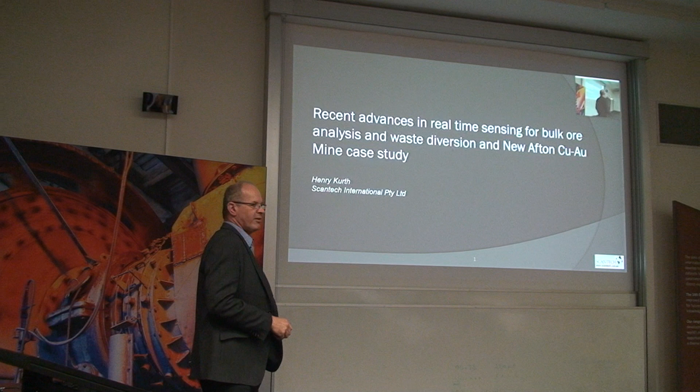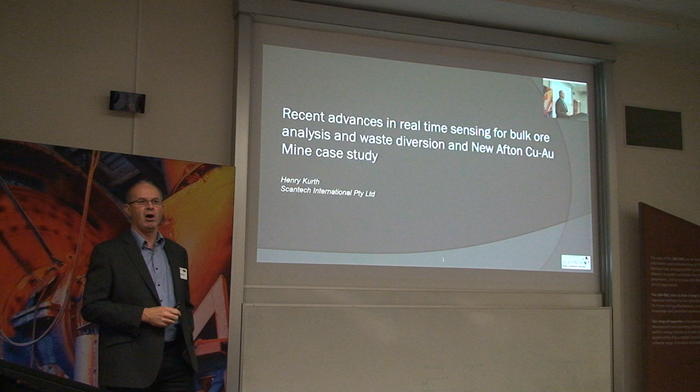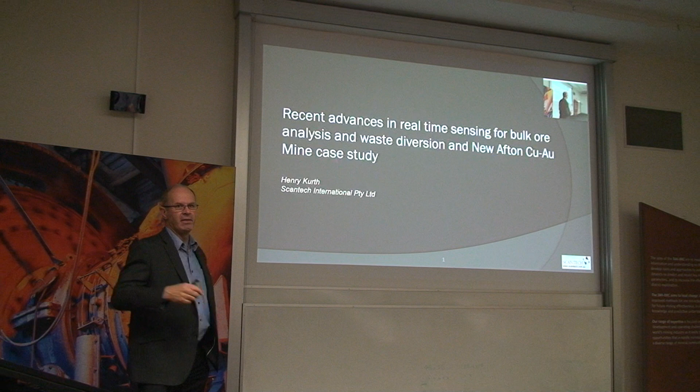So today's presentation - I guess there's a lot of interest now in the industry on trying to improve the efficiency of processing operations. There's large reductions in grade historically, so we're treating material that's much lower grade. What we're looking at are opportunities to use the latest technologies to improve the quality of material going to a process plant. One application is real-time sensing and then making decisions based on those sensing results. So this presentation focuses on the sensing technology, how it works, what it does, and then how it's being applied to various operations, particularly at New Afton copper gold operation. I'll talk a bit about the history of why they thought the sensing would work and some investigation work that they did, and then how it's been implemented and where they're at the moment.

Typically we find that we need to explain the technology in most audiences because they're not all aware of the technology's capabilities, so we typically do a bit of that. Then we talk about some of the other applications, of which this is just one of many, so we need people to be aware of that. We haven't designed this equipment for bulk sensing, for bulk diversion or bulk ore sorting - that is just one of the applications of this technology. And then we can talk a bit about New Afton and then just summarise.

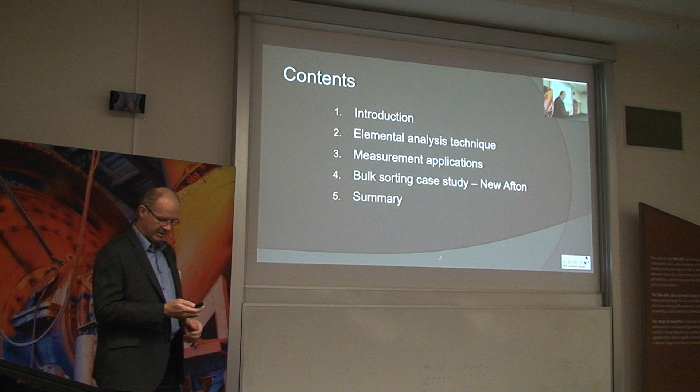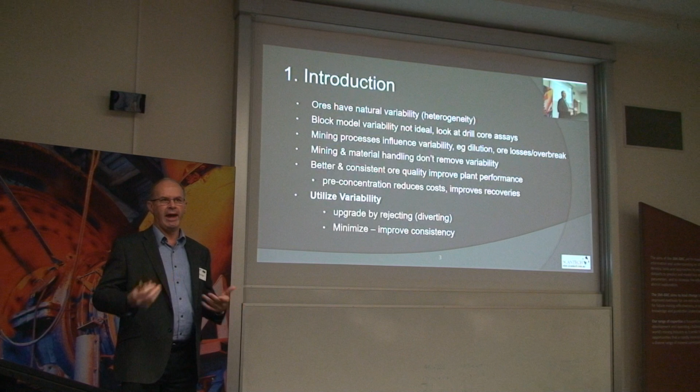So why do we need this technology, or why is it applicable? And the reason is because ore bodies have variability. If ore bodies were all homogeneous, we wouldn't need to worry about process engineers, we wouldn't need to worry about real-time control, feedback, reactions to changes - we would just have a nice manufacturing plant. And that is one of the main differences between manufacturing and the mining industry. Manufacturing deals with controlled inputs, the mining industry deals with a highly variable ore body. And it's not just variable in the way it's mined, but its quality, the flow rates to the mill. So there's a whole lot of parameters that vary, and what we're trying to do is just look at some of those parameters to try and measure them. For us, it's the composition.

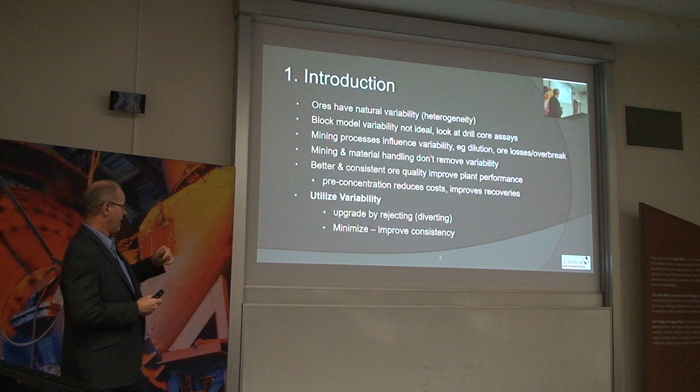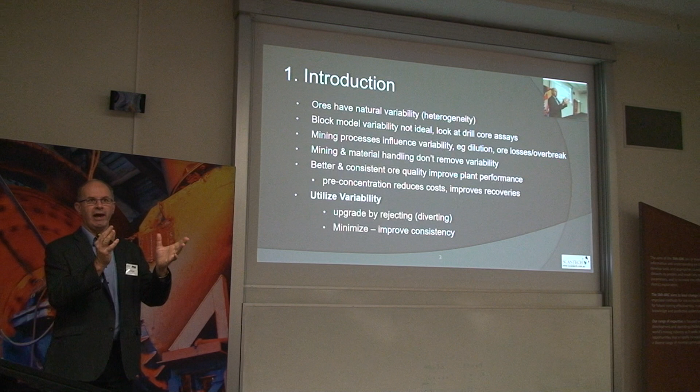So if it wasn't for the variability, we wouldn't need to develop these technologies. Having said that, there's very few measures of variability we can currently use that will help decide whether this technology will be useful, and that is one of the big problems. It's very easy to look at a block model and say, okay, we have a block with a certain grade or quality parameters, we have another block, but because it's an averaging process, you find there's not much variability between blocks, and these blocks could be thousands of tonnes or tens of thousands of tonnes. What we're measuring at is a much smaller scale. So we're saying, well, what's the variability every 10 tonnes? And the block model won't give you that. So you have to go back to drill hole assay data and say, what's the variability down a drill hole?

Because that is the level of detail we're seeing on a conveyor and measuring in real time. So that's sort of the context of why we need to do a bit more investigation to understand variability at an ore body scale. And it's not just the variability in the ground, it's what we do with that material. We mine it, we dilute it, we leave bits of ore behind, we stockpile it, pick it up and we process it, hoping that it's homogenised, which it never is.

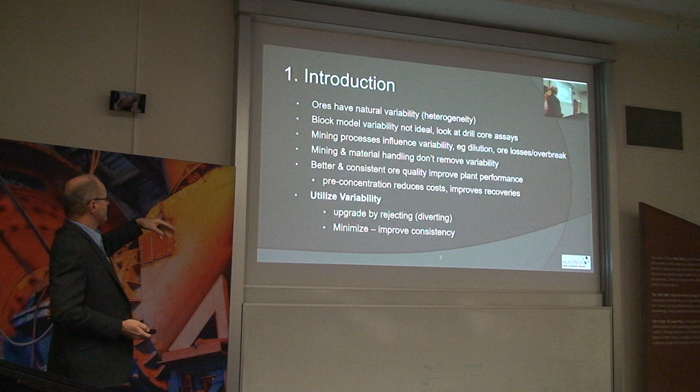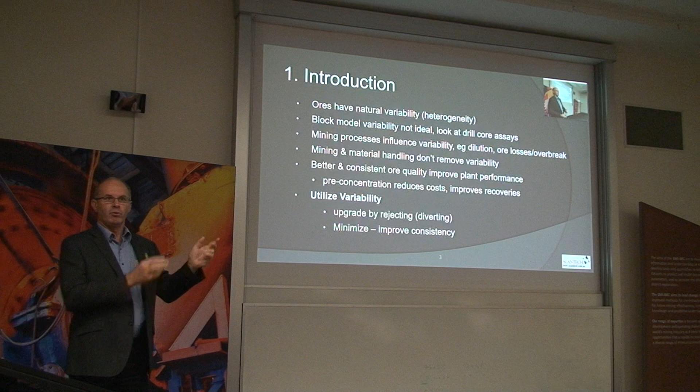So what we're looking at is some sort of a pre-concentration application here where we can remove undesirable components of the flow between the mine and the mill so that we don't have to treat those. And if we can remove waste to upgrade the material, produce the same or more concentrate from less tonnes of feed, that's a good thing.

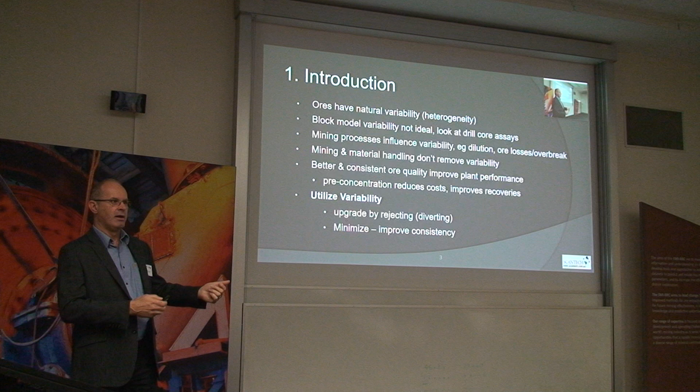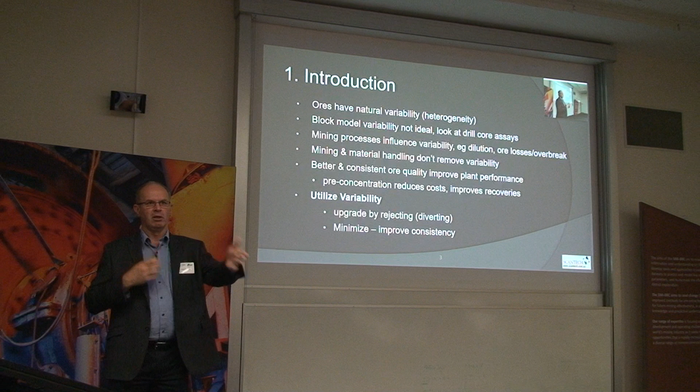The key thing with variability is we don't want to homogenise the flow. We want to retain the variability so that when we measure it, we can then respond to it and remove or make decisions based on those measurements of short increments of flow. So we can remove waste, we can remove deleterious material, we can stockpile low grade, high grade separately, and then we can control what we feed to the process plant. So the way we want to do this, ideally, is in real time. Now, part of the sensing technology also really requires that it's representative.

There's no point having a sensor that's giving you ballpark figures, not really in a meaningful, representative way that you can make confident decisions based on the data it's generating. So what we need is a method that's accurate, representative, reliable. We can have high confidence in the technology.

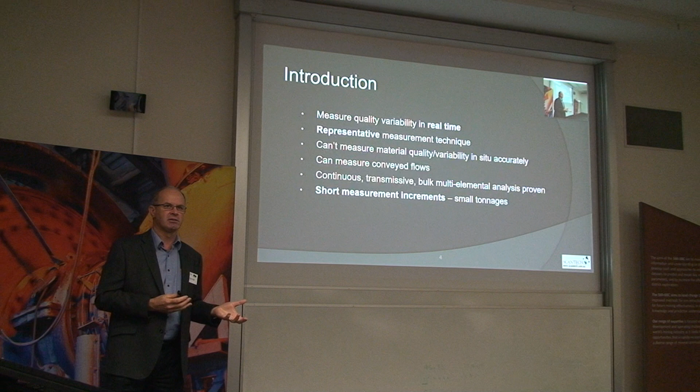The advantage of sensing technologies is they're very good at measuring conveyed flows because it's an ideal presentation to the technology. It's very hard to measure a haul truck because its configuration isn't ideal for most sensing technologies. It's okay if it's uranium grade - you can put a scintillometer there and detect the signal given off by the truck. That's great, but we can't do that for copper ore, lead zinc ore, or gold ore, so we have to come up with other ways of measuring that material.

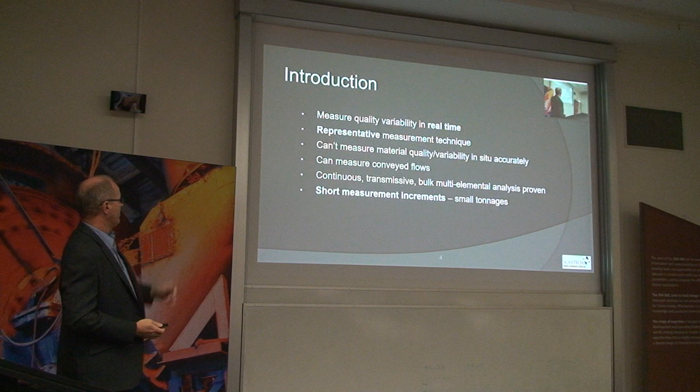The advantage on a conveyor is the continuous flow. We can measure using a technology that's transmissive, so it penetrates the full flow across the full cross-section of the belt as it's moving along. We're measuring continuously through the material, generating multi-elemental results as short as every 30 seconds.

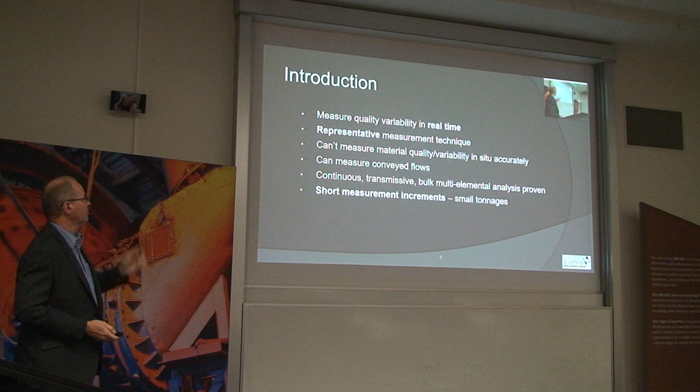The short measurement increments mean we can make decisions on small tonnages. This increases our selectivity in terms of bulk diversion or bulk sorting, which is what this presentation is about. When we talk about sorting, most people think particle by particle. What we're looking at here is basically increments of material - it's not really sorting, it's diversion of an increment, more like an automated grade control. The focus is on bulk measurement, decisions on bulk increments, not particle by particle.

Effectively what we're doing is trying to divide that flow into different components that we want to control. Some of that material could be better ore that we want to process earlier in the mining timeline. We might want to put poorer ore to a different process or stockpile to treat later. We might have sulphide and non-sulphide material that can go to flotation or leaching - different processes that apply.

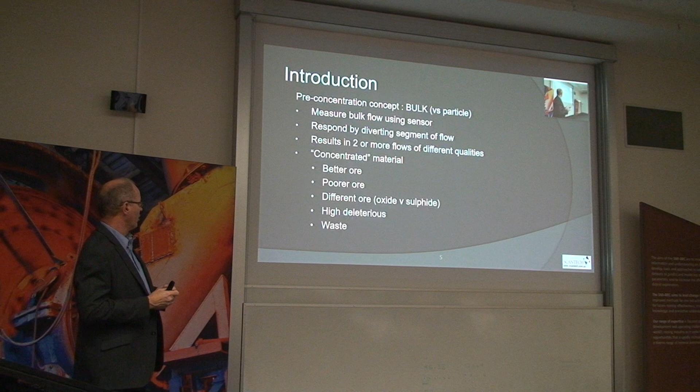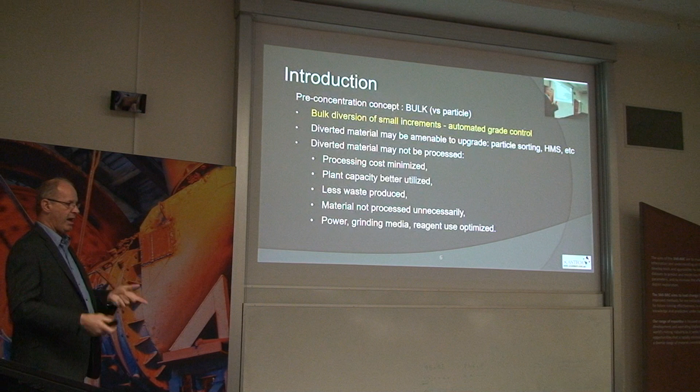There could be highly deleterious material we just don't want to process. Copper grade might be great, but talc content could be 20%, so we may not want to process that material. And obviously waste - if we can get rid of waste before we process it, fantastic. Less material going to tailings, less reagents spent, less power, less grinding media. Any waste we don't process has huge benefits to the operation.

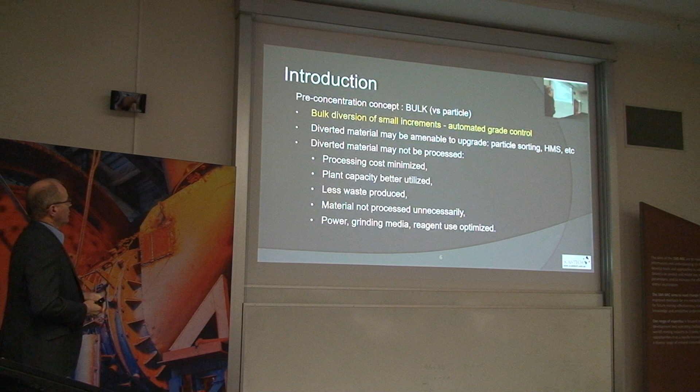So what we're effectively doing is automated grade control on a conveyed flow. Instead of a geologist looking at a haul truck and saying that truck loads ore or that truck loads waste, we don't necessarily need to do that anymore. We can put everything on a conveyor, measure it accurately, and make decisions on every maybe 10 tonnes - an objective way of measuring based on elemental content.

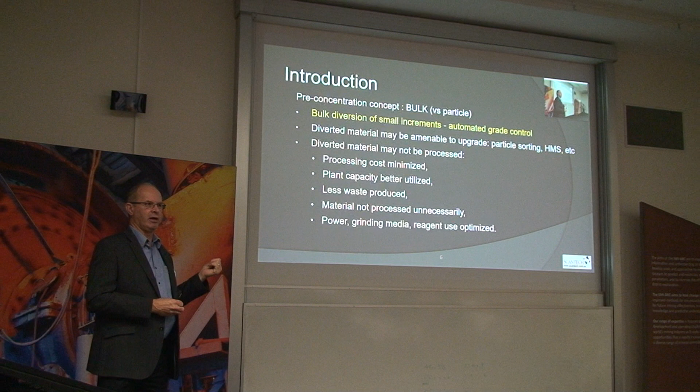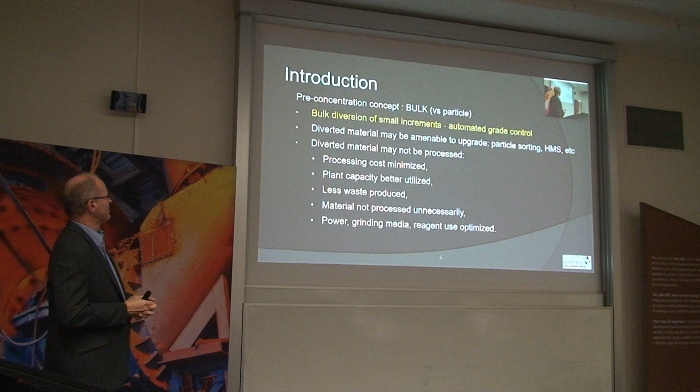I'm not saying - I'm a geologist, I don't want to make geologists redundant. I think there's still a lot of requirements for geologists, but in a grade control application like this, maybe there can be less geological input.

Some of the material might be suitable for upgrading via other processes. For example, if you have a high-grade ore that's diluted, it might be very amenable to particle sorting or dense medium separation, or some other method of upgrading that material and then putting it back into the plant so the waste component is thrown away.

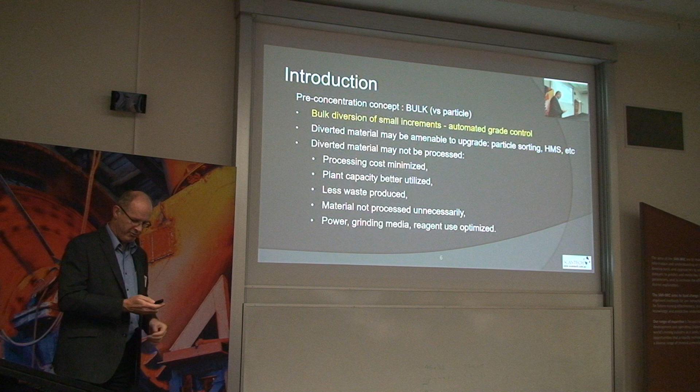There's a whole range of benefits, which you're all aware of, in not processing material unnecessarily, so I won't go through those. So let's talk about the technology.

The technology is not new - it's been around for 30 years on a conveyed application. It's been used in the coal and cement industries for over 25 years, and used for laboratory analysis back into the 60s, as far as we can find, probably earlier.

The key aspect of the technology was prompt gamma neutron activation analysis. Prompt gammas are what's produced from the neutron activation process, and we're analysing the spectral data from a series of detectors above the belt and from a source underneath the belt.

Now we use californium-252. It's the most prolific generator of neutrons available. It's currently the most expensive substance known to man, but don't let that bother you — we only need a small amount, so we use 50 micrograms to start with.

It has a short half-life of 2.65 years, so every 2.5 years we add another 25 micrograms to the unit to get the activity level back up, and then it decays over 2.5 years, you top it up, etc. So the level never goes below 25 micrograms, which is the basis for our performance estimates for each element in terms of measurement accuracy. We get better than that most of the time, but that's the minimum, the worst accuracy we go down to.

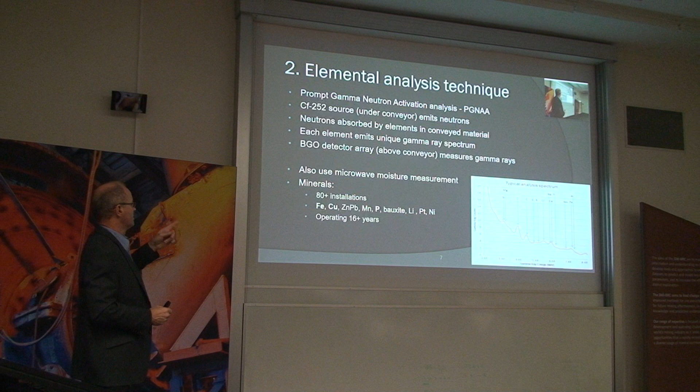In minerals now, we have had installations since 2002 in the iron ore industry, so we have close to 85 installations now in about 10 different commodities. I haven't included the coal and cement sector in those, because this configuration is a much higher specification than the one we use in coal and cement.

And that's part of the problem if you're looking for a unit these days — there's a lot of vendors. Each vendor will say, well, we use PGNAA, and by definition, because there are 80 successful installations, it will work in your mine. The problem is, different configurations will not work. So it has to be configured appropriately to the mineral sector, and it has to be custom calibrated to each application. You can't use an off-the-shelf calibration and achieve the sort of performances I'm going to be talking about.

So the elemental system is usually mounted on a conveyor with a walkway — you can stand next to that unit. The level of radiation on the outside of those tunnel shields is the same as 10 bananas. However, in Queensland, we've got to put a fence around it and use a smaller source. But you can walk into any supermarket and there's no warning signs around the banana display. It just shows that regulation in the mining industry is out of control.

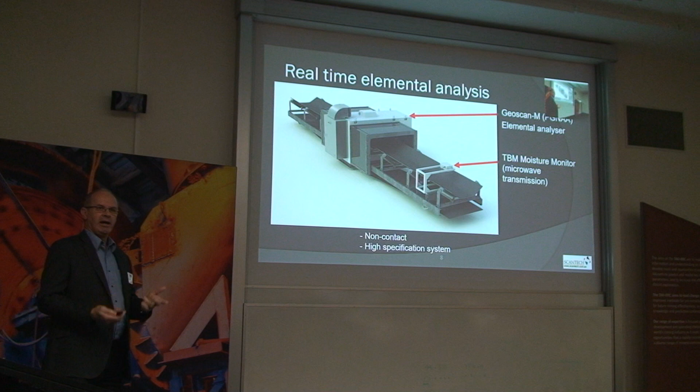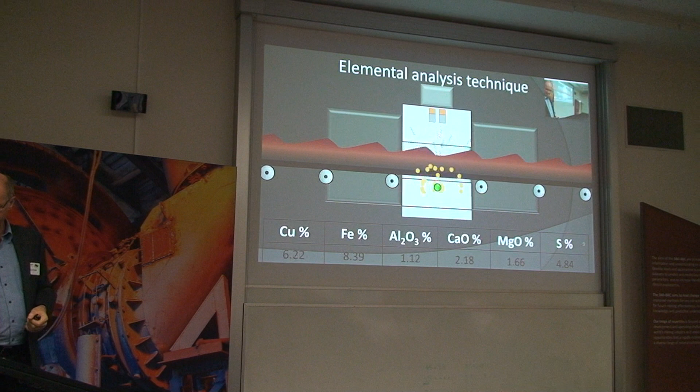This is just what I explained. The radiation source is the green dot, a very big green dot for a 50 microgram source. It's equivalent to the size of the end of a pencil, or that silver bit on a plug — about 12 millimetres long, 6 millimetres in diameter, a double encapsulated piece of californium wire. Costs about

$70,000. These numbers are from a copper mine, Sepon, so the grade is real — their average copper feed grade is about 4.2% copper. These results are every 2 minutes. As I say, the source is the green dot, the neutrons are the yellow dots coming out.

The material absorbs those neutrons, the gamma emissions are given off, and the detectors at the top detect the emissions given off. The advantage of the design is that these idlers support the unit and support the flow of material through the conveyor, through that tunnel, so there's no contact with the unit, no wear components, no contact with the material or the belt, so it's extremely low maintenance. This design has evolved over many years.

Other units might have similar designs. We have a patent on certain aspects of this design, and it's been challenged, but we've been successful in defending that patent.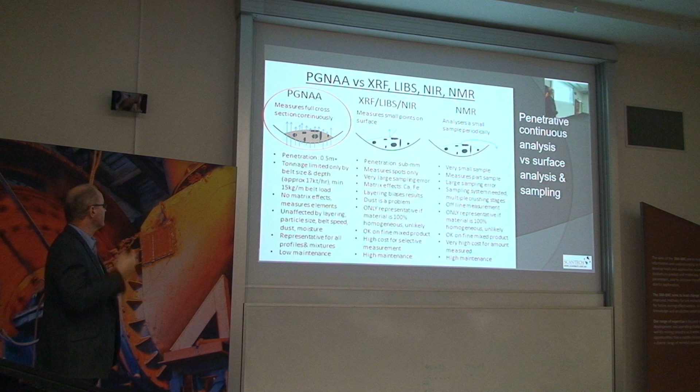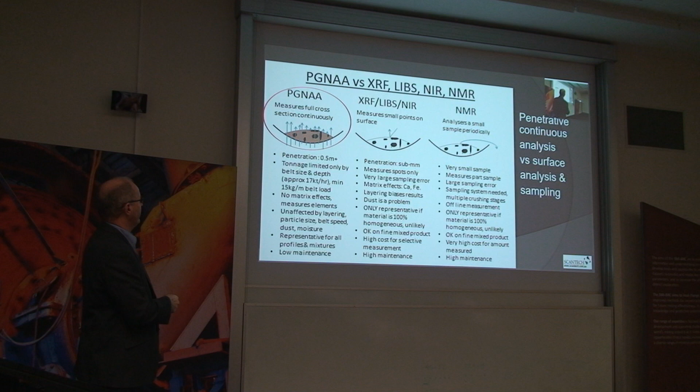So why PGNAA? We know PGNAA is fully transmissive, it's elemental. We know there are other technologies—XRF, LIBS, near-infrared, laser-induced fluorescence, X-ray transmission, magnetic resonance. There's a whole range of technologies out there that don't give you the same capability as PGNAA.

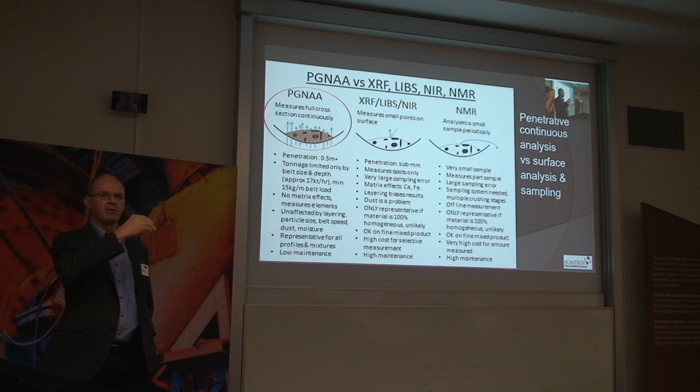In coal, X-ray transmission is used to look at how much ash there is in the coal. So it's not actually measuring the elemental content.

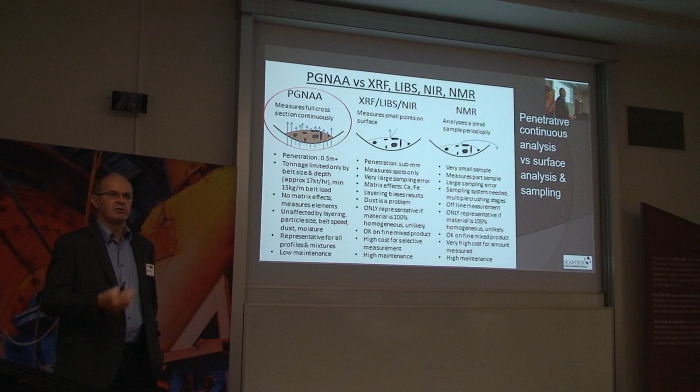Those technologies I just mentioned—X-ray transmission, XRF, LIBS, near-infrared—a lot of those are used in particle sorting applications, because they can penetrate through small particles. They do struggle to penetrate through half a metre of rock.

The advantage of PGNAA is it's extremely high energy, but it's an instantaneous process, so there's no residual radiation. It's not affected by particle size. The neutrons and gamma both have high enough energy to penetrate half a metre of rock.

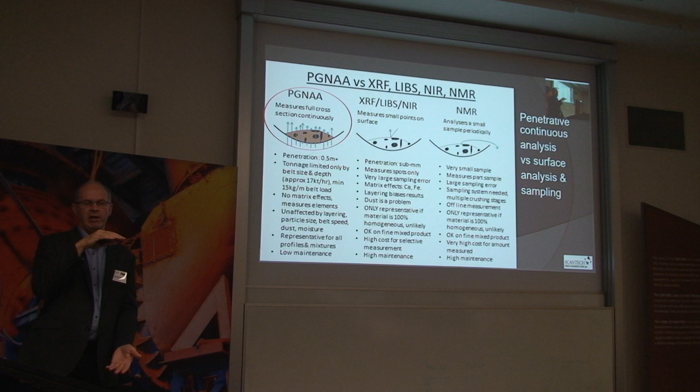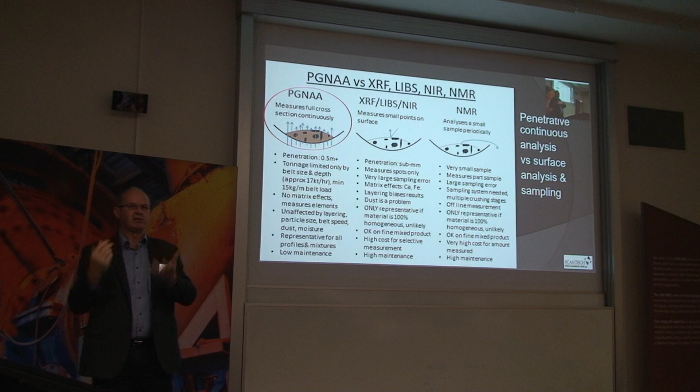So if there was a continuous flow, if someone had sliced a lens-shaped sliver of rock out of the ore body, like drill core, and fed it continuously along a conveyor, it would give you the same reading as if that material was crushed to micron size. Because the system doesn't see particle size, it only sees elements at the atomic level.

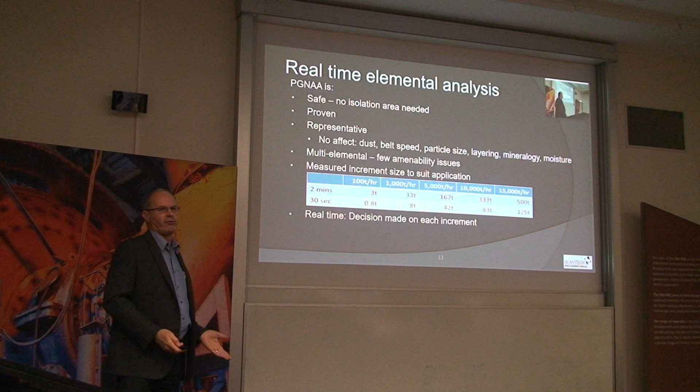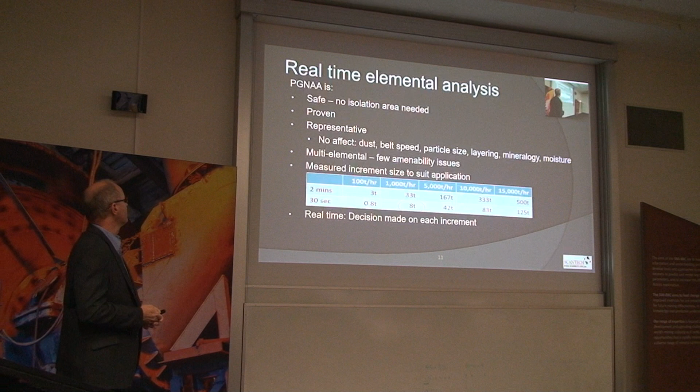So what we're talking about here is a technology that's proven to be safe. We have over 300 installations in the cement and coal industry, now 80 in minerals. It's been used for 25 years by us, as well as other vendors. So it's well proven, it's proven to be safe. We're not aware of any incidents that have occurred. There's a few potential ones coming up, but that's a different story.

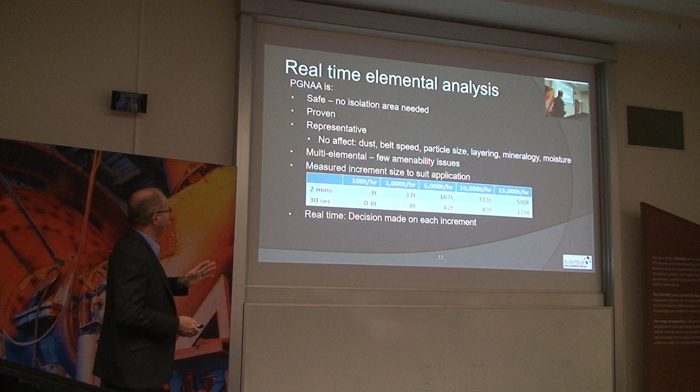We know it's representative because we've rearranged material on a belt and remeasured, and got the same results. We've put big rocks in, we've crushed it, we've put fine material in—same results.

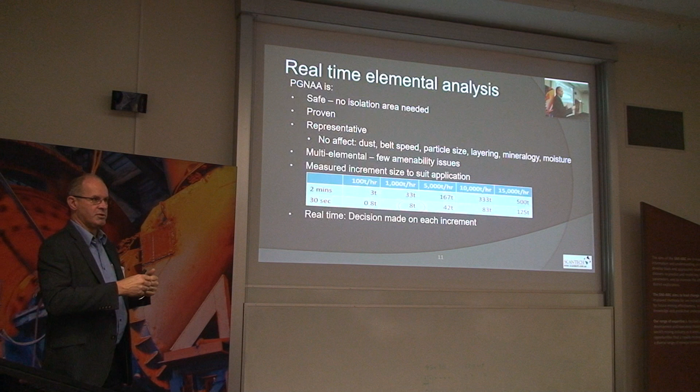The advantage of the system is that for certain flow rates, you can measure over certain time frames, so you can work out the tonnes that relate to each measurement. Each measurement is a continuous accumulation of spectral data averaged for that time frame. So over 30 seconds, we're averaging the spectral results. We're taking inputs from a belt weigher, so that if there's variability in tonnes per hour through that time, we take that into account.

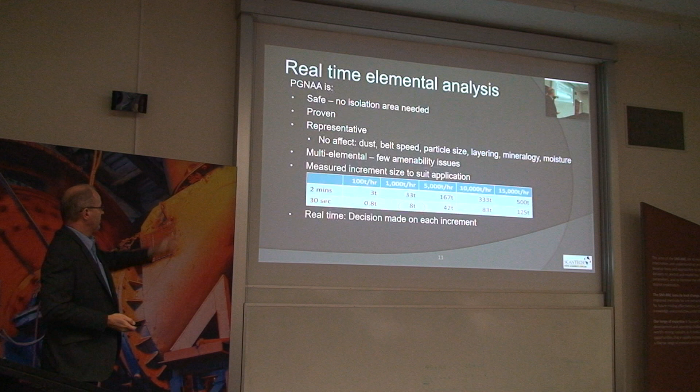So 8 tonnes, the one that's circled, is the sorting increment that New Afton and New Gold are using at the moment. What do we measure?

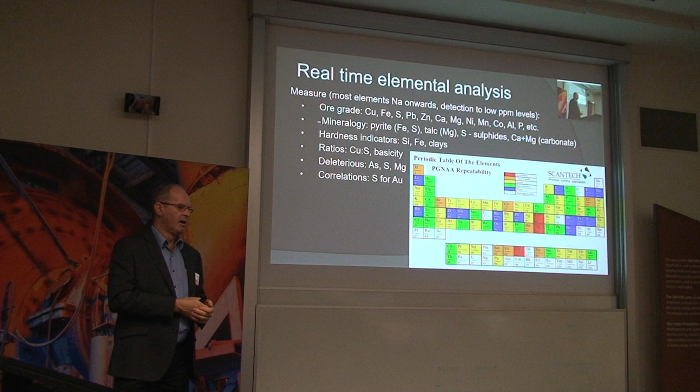So in lithium, we've sold 2 units in Western Australia. They have a formula where we input all of the elements that we can measure, and based on that formula they can calculate, because of mineralogical associations, the spodumene content, which correlates with the Li2O content. So our measurements of the other elements gives them an accuracy of about 96% correlation with the Li2O grade. That's good enough for process control - it's not intended to be an absolutely accurate measurement system.

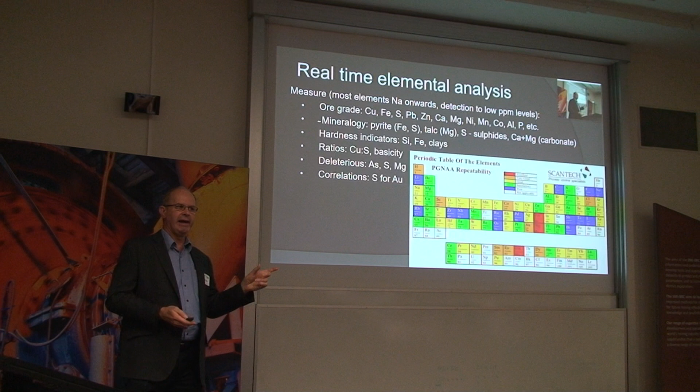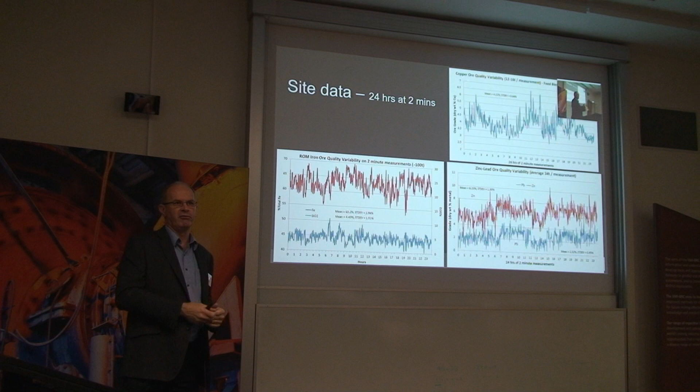Each one of these represents 24 hours of 2-minute data. So the top one is Sepon. Sepon is a controlled feed - every half an hour they composite the tonnes and grade that they've put into the plant and then modify the feed blend for the next half an hour if needed. If the metal tonnes feeding the plant, being a leach circuit, are within their target range, they don't change the feed blend. If it's trending out of range, they modify the feed blend to adjust for that. They don't want to overload the leach circuit with copper metal.

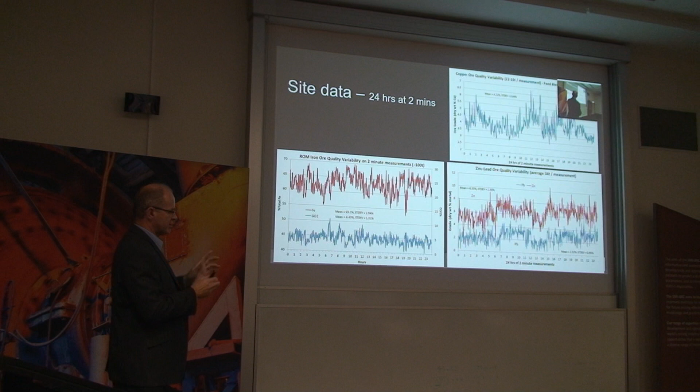The lead zinc is Mount Isa, so that's a day in the life of the heavy medium plant feed conveyor when it was running. And the iron ore one is one of the Pilbara iron ore sites. You can also see that the 2-minute measurement increments relate to different tonnages - this throughput represents 300 tonnes an hour, this one's 1,000 tonnes an hour, and this one's 3,000 tonnes an hour. So each of those 2-minute measurements represents whatever tonnage goes through in that 2 minutes.

People say, well, what's measuring variability important for? We know we're going to get it, we've just got to deal with it - let's just see what happens. We'll twiddle some reagent knobs and hopefully we'll achieve the target recoveries. Well, in practice that doesn't happen.

Codelco did a lot of test work because they found that even though their feed grade was 1% each metal accounting period, the recoveries didn't reflect consistent performance of the plant. So when they assessed the variability of the feed grade within those measurement time periods, they came up with a graph which showed that the more variable the head grade was, even though the average was 1% copper, the poorer the copper recovery was during that period of time. So the outcome of this was that they changed their scheduling from the mine to the mill to try and improve the consistency of the ore coming to the mill.

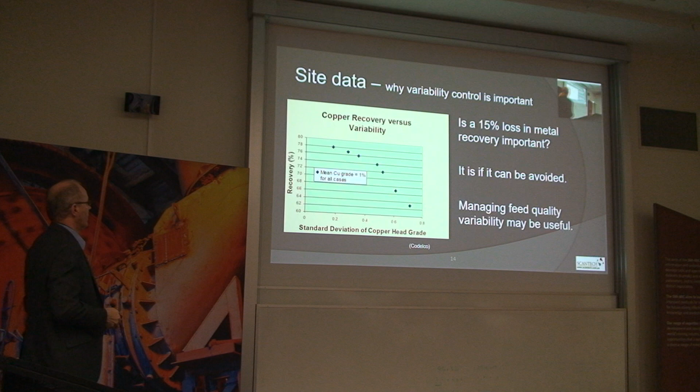I mentioned earlier that the technology has many applications, and the diversion or the bulk sort is one of those. This is most passive to most proactive in terms of top to bottom. So diversion is considered a fairly active response to data. The other ones are basically, is the quality what we expect? Let's measure the input and the output and optimise the process. Okay, we've got material coming in, let's make decisions on the increments.

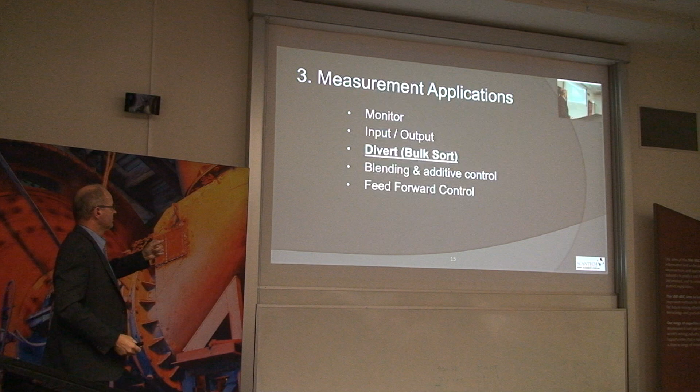One of those could be, okay, the material is particularly high in silica, so it's harder ore, so we need to slow down the feed rate to the mill, otherwise we're going to overload the mill. Another one could be, okay, we're getting a high slug of talc, we might need to increase the talc depressant to the first depression tank. Or there could be a high slug of copper coming through, so maybe we need to change the reagent regime to cater for that extra copper metal. So there's a whole range of parameters you can adjust based on knowing what the quality is before it actually hits your system.

So bulk diversion is fairly simple. Conveyor, sense or measure the material and then make a decision on where you want that material to go.

There isn't just one application for that. Obviously you can do that on a feed conveyor and then stockpile the material into different grades. You can remove waste, high deleterious components. You can put it on a pebble recycle circuit and say, if that pebble isn't worth putting back in the mill, why am I occupying mill capacity with that pebble when I should be rejecting it and replacing it with ore that actually has metal in it?

Product quality bypass - this is more where iron ore, bauxite applications where material comes from the mine and sometimes it's already product quality. So why beneficiate it when you don't need to? We have an application in South Africa where we're saving $7 million a year by not beneficiating 5 million tonnes of product quality iron ore.

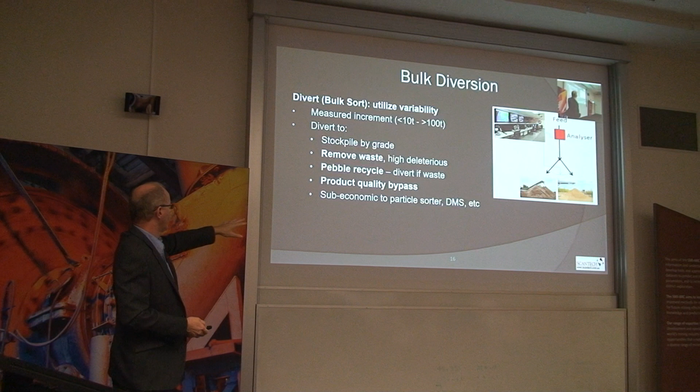And sending material off to different processes. So if you have some marginal ore that can be upgraded, well then you can divert that to that process.

So the key requirement for an effective bulk diversion process is three things. You need a sensor that's representative, responsive, gives you real-time information. You need a diversion mechanism that is responsive, able to respond quickly, so that if you have a 30-second measurement increment, you don't have a diversion system that takes 10 seconds to move from one position to another, because that increment won't be accurately selected.

So that's becoming the limitation now. We're not seeing too many operations who have got diversion systems that are responsive enough. So they want short measurement times, but they can't benefit fully from those because they're not able to divert quickly enough. So unless your diversion system can respond within less than a second, you're actually introducing another error in selecting that increment.

The key thing in any bulk diversion application is the strategy. You don't want to apply a cut-off grade based on other parameters. You need to take into account the variability on that scale and pick an appropriate cut-off that's appropriate for that material at that time in the operation's life.

So you would expect to use a different cut-off from day one than you would in the last years of the operation, where they want to process all the material that they can because capital's been paid off and you've only got the operating costs.

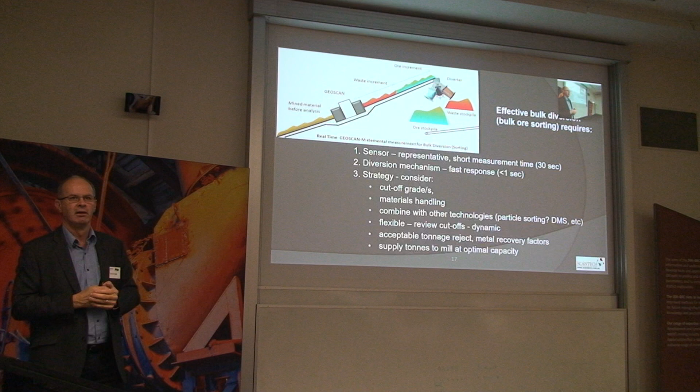So the other thing is materials handling. You need to realise that if you're going to divert 30% of the feed to the mill, how are we going to manage those tonnes? We can't just put them on a little stockpile with a little front-end loader if it's 30% of our throughput. We need to put in place conveying systems or other means of getting rid of that material.

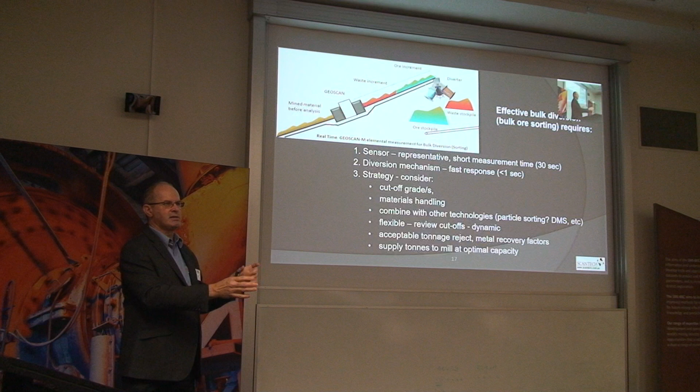We've mentioned the other things before - acceptable tonnage, reject and metal recovery factors. We get mining companies saying to us, we would like to reject 10% of the material but only lose 5% of the metal. And we'll say, well, how do you know you can achieve that? Well, we don't, but those numbers sound about right. So it's okay, it's a good ideal, it's a dream, but let's look at reality and say, okay, you may need to measure the material at that scale to understand its variability, to then develop a strategy.

And you can do it as an iterative process, because even just measuring in real time, you can still use those other benefits of the real-time data. You can feed forward, you can do reconciliations, metal accounting, and all those things with that data while you're developing a bulk ore sorting strategy.

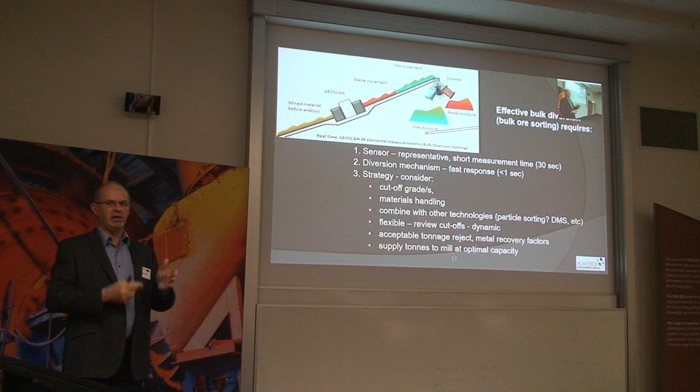And obviously we don't want the mill to run out of tonnes. So sometimes we will override a cut-off because the crushed ore stockpile is low and we just want material going to the mill to keep it running.

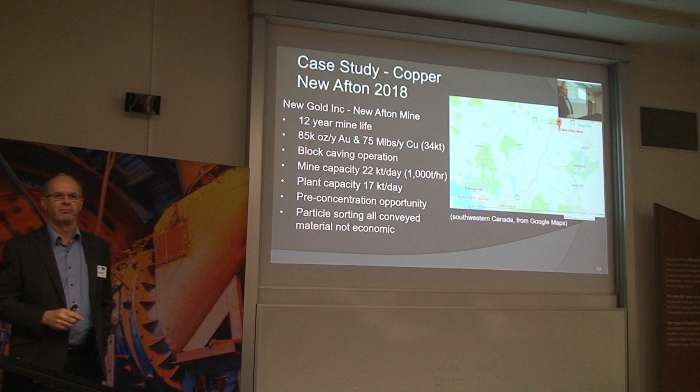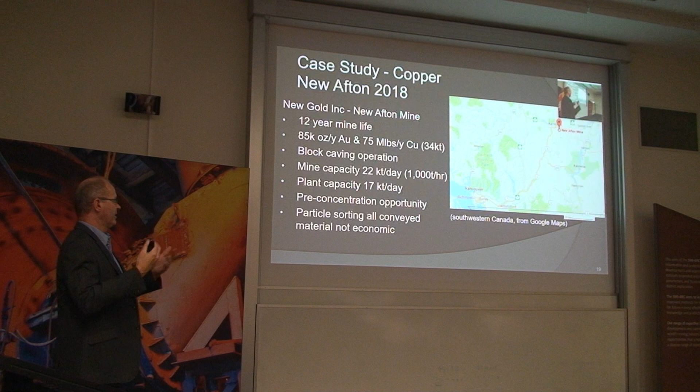So for the last 10 minutes or so, we'll talk about the New Afton operation. The advantage New Afton have is that the mine has a greater capacity than the mill - about 25% more. So they have the ability to potentially divert 25% on average of their mined material and still keep the mill running. The advantage they have is it's a block cave, so they know they're going to get waste. At some point, pulling out of multiple draw points, they're going to turn to waste. So it's a great application for the technology.

They did look at particle sorting and said we can't particle sort 1,000 tonnes an hour effectively and economically - it's just not going to work. So they did some of those studies already and realised they need to look at bulk analysis and bulk diversion.

How did they evaluate it? They thought bulk diversion would work, but what data did they have to look at? They looked at samples they were taking from draw points - nearly 2,500 samples collected over a long period of time. Each sample was collected at the end of a shift for a draw point. During a shift, 300 tonnes would be mucked out of that draw point into an ore pass, and then the sample would be taken - not a very good sample, but a sample nonetheless.

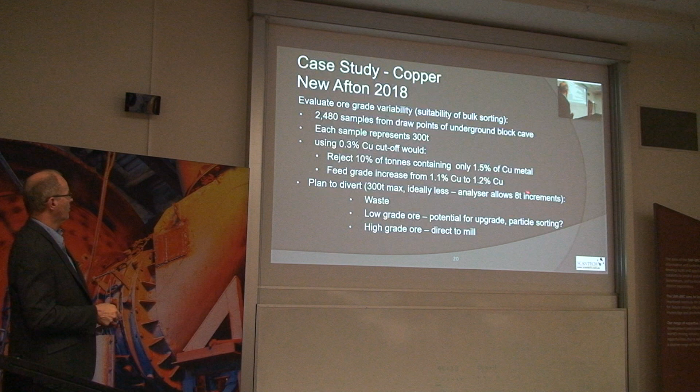So they said, great, that's all the justification we need to go ahead with the project. Initially they planned to divert waste, low grade, to particle sorting, which was still to be assessed further, and the high grade would go direct to the mill. That was based on a 300-tonne decision. What we're giving them is a decision every 8 tonnes, so we're giving them a much higher level of selectivity to base their bulk diversion decisions on.

The first thing, they sent us samples to do test work. To get samples, we need the customer to crush them, sub-sample them, so that we have a lab assay to calibrate to. We received 6 blue crosses as calibration samples, and 3 samples as blind samples where they didn't tell us the grade. So we set up calibration, tested the blind samples, and they were very happy with the performance.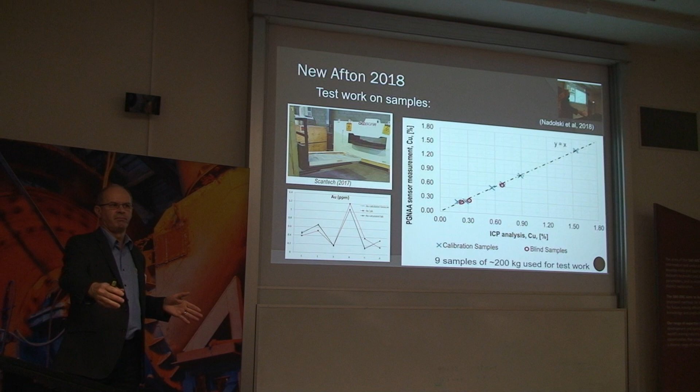Each sample was about 180 to 190 kilos. The reason for that is that's the equivalent of 1 metre of conveyed flow at 1,000 tonnes per hour at that belt speed - that's what the analyzer will see at any given point in time, so that's the sample size we asked for. The samples are tested in a production analyzer, the same type that would have ended up on site.

Interestingly, there's a gold graph there - we were able to calculate gold from the copper and sulphur. Now, they had calculated the gold themselves using their lab data. The lab data was the red lines, their calculation of gold was the dark blue, and calculation of gold from our analyzer results was the light blue. The reason we're so close to theirs is because we used their formula to calculate the gold from the copper and sulphur. So that demonstrated a reasonable estimate of the gold grade.

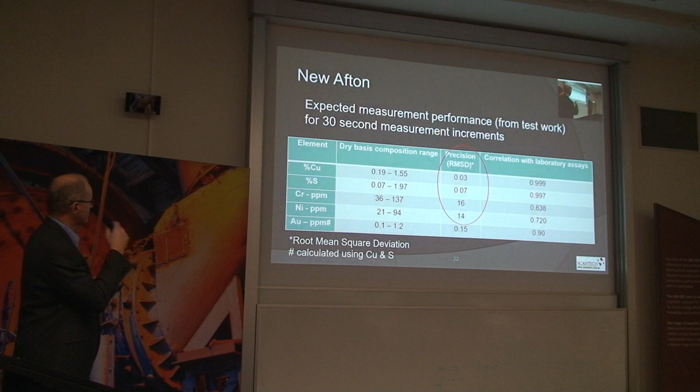And this is the accuracies we achieved from that test work. So basically for that range of copper, we achieved a measurement accuracy of 0.03% copper. That's the correlation between the lab and the analyzer results.

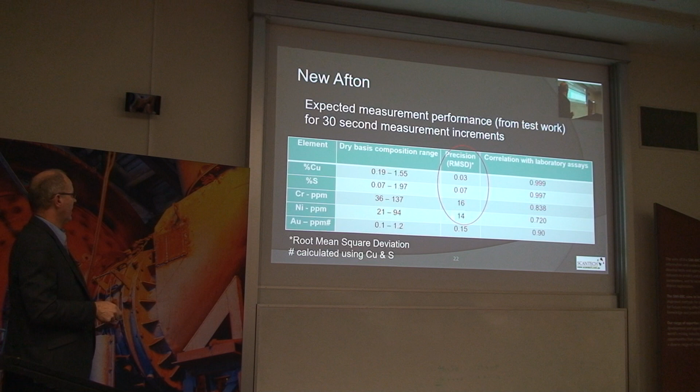For sulphur, accuracy 0.07% sulphur. Chromium, these are in ppms, so they're the ranges of chromium and nickel, and the accuracies for measuring those around 15 ppm.

And for gold, the range was between about 0.1 and 1.2 grams a tonne, and the calculated gold result was within 0.15 in terms of the root mean square deviation of those results. So they were happy to proceed.

That's why they wanted the nickel and the chromium results, because the picrite has elevated nickel and chromium, and if they see that coming out of the mine on their conveyor with a sensor on it, they know that it needs to go to the waste irrespective of the copper grade, because they cannot recover the copper from that material.

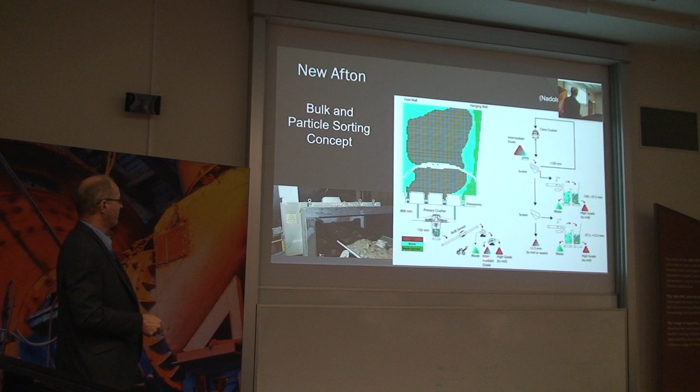The plan was to divert into 3 destinations: waste, low grade, high grade, and the low grade or intermediate grade, they were looking at a 2-stage particle sorting process. That hasn't happened. They're still trying to work out if they can justify it.

So this is how it's going. They're measuring every 30 seconds. The results are correlating well with sampling they're doing off the conveyor.

They're fine-tuning the lag time between the analyzer and the diversion system, because the analyzer is 6 minutes travel time back down the decline from the diversion point in this conveyor.

Crushed ore stockpiles in the background. This is the material that's being diverted that's considered waste.

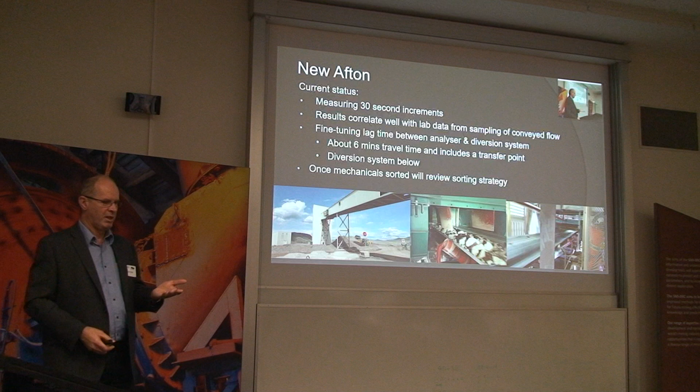Their diversion system is a bit different. It's actually a hydraulically actuated series of lifters that lift the conveyor belt up, flatten it, and press it up against a fixed plough.

Okay, so you can see the plough here. So that plate doesn't move, but when they want to divert for 30 seconds, the belt is lifted up, flattened out, material is ploughed off for 30 seconds, and then it drops down again.

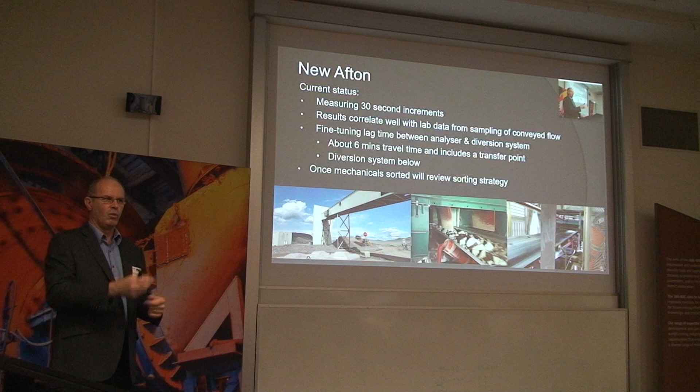Whether that actually happens within a second, I don't know. So they're still fine-tuning their system.

One of the problems is the conveyor, from underground, is 4.2 kilometres in 3 legs, and the analyser is installed on the second last conveyor.

Because on the last conveyor, it's the main decline into the mine, and they didn't want to put it in that location because of infrastructural risk, potential for collision with trucks and various other things. So that's why there's a 6-minute lag time.

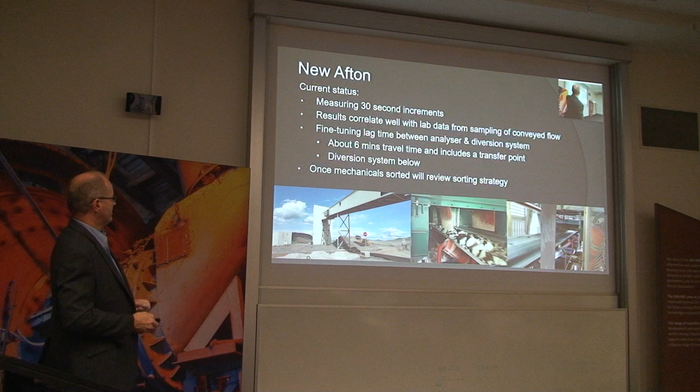Normally, we would put it at the start of the conveyor, at the end of which you're diverting, because then you have more confidence in your lag time.

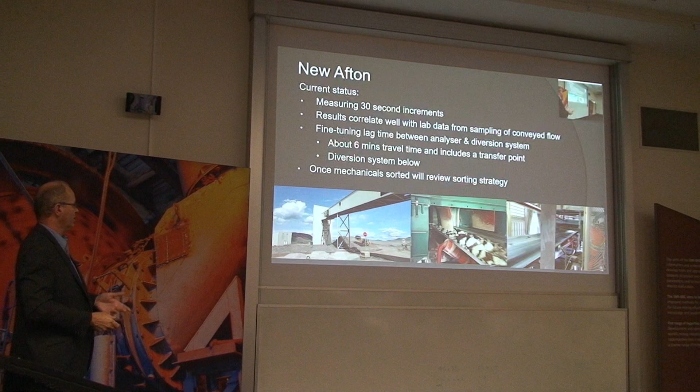If you've got to go through chutes and other transfer points, you've got more delays, some of which you can't control. Depending on the flow of the material etc., you might get a couple of seconds of delay longer than you expect, and therefore your selected increment isn't as accurate as you hope.

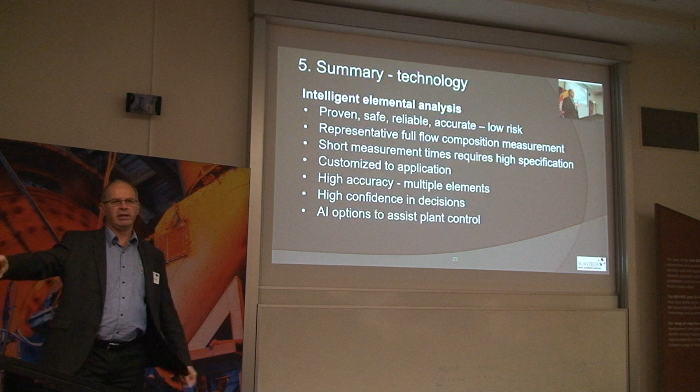So just summarising, what we're trying to do is supply a technique that's customised for this application. So for bulk ore sorting over 30 seconds, it's a very high specification.

It's a different specification to the Sepon one where we're measuring for 2 minutes, because over 2 minutes you can use less detectors, for example, and you're averaging over a longer period of time. So that measurement can be quite accurate.

When you come to 30 seconds, you're sacrificing time, and time means the number of counts. So to get more counts over a shorter period of time, you need more detectors or a larger source or some software modifications. So that's why the systems are different for each application.

All of these things we've discussed, so the last point there is AI options to assist plant control. So we are working with some companies in the AI area to help us model our clients' processes so we can try and come up with improved responsiveness to real-time results.

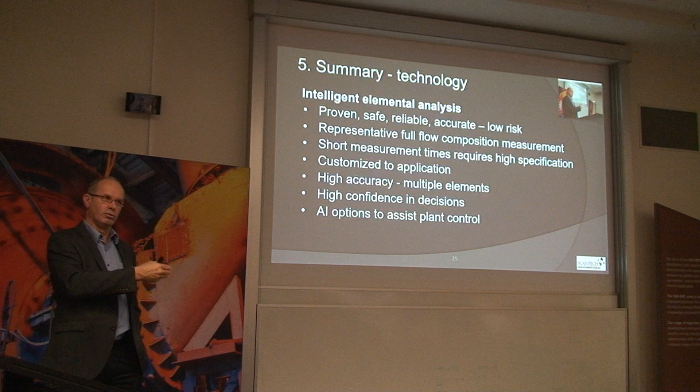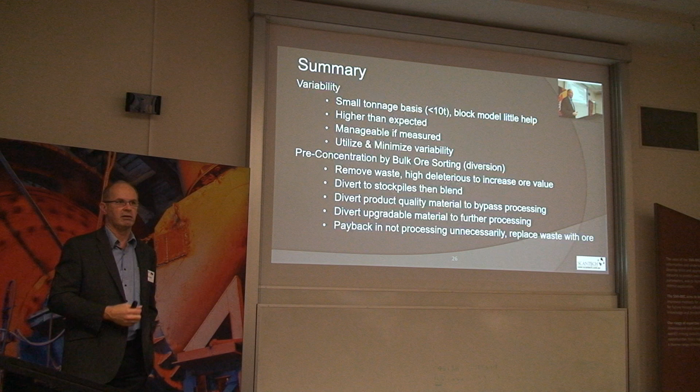Key thing here is we're looking at small increments. So 10 tonnes is about the size of a loader bucket, and we're making decisions on every loader bucket equivalent with an accurate measurement.

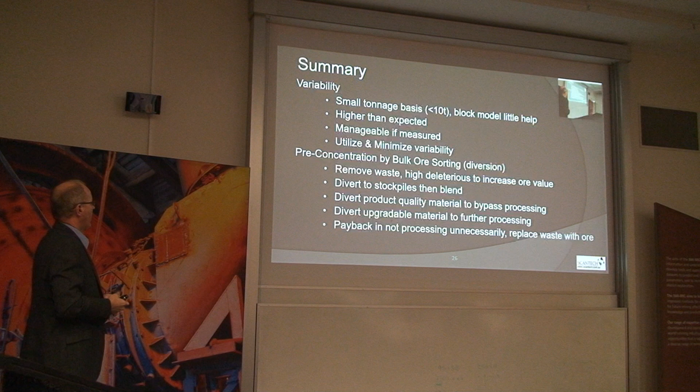Variability is always higher than expected at operations on that measurement basis, because in their minds, variability is the difference between that block grade and this block grade, and they've all been averaged, so it's not as high as it actually is on a conveyor. And variability is manageable if you measure it. If you're not measuring it, there's nothing you can do about it except respond to it.

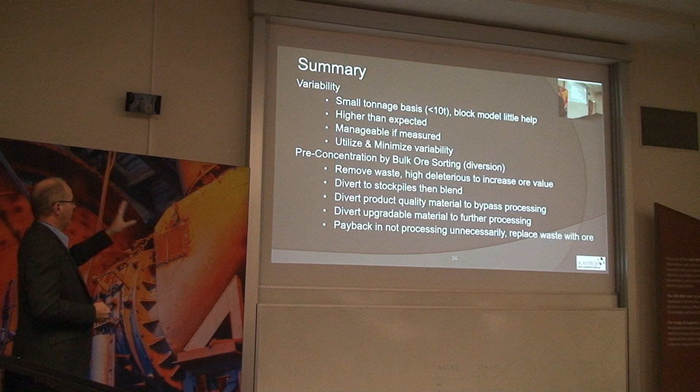Again, most of these I've already discussed, so I won't go into it. Okay, are there any questions?